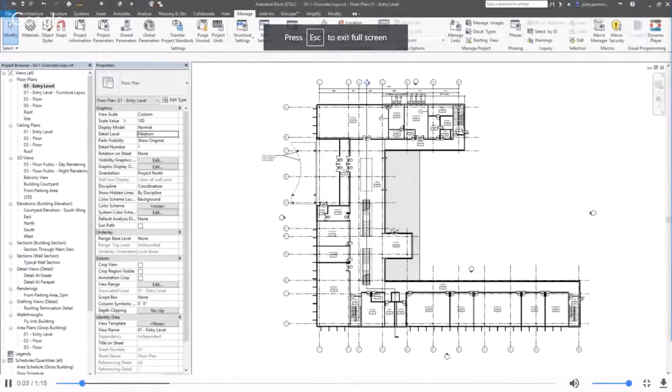What I did, and I'm not going to do the process again, I got every room in the model, got every center point of the room, placed an elevation marker at every center point of the room, and shot an elevation all 4 ways. And then I also sheeted those views on a newly created sheet with Dynamo in about 6 minutes. So I did that this morning in preparation for this.

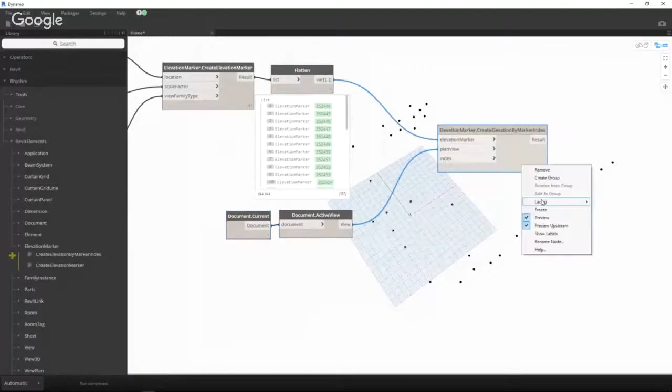So we see the elevation markers. There's a lot of little other things in here that I won't explain right now because I can't talk that fast. But we create an elevation at each corner of it now. So see that? Those weren't there before. We go from there and we generate a grid to place views now. And then I create a sheet. I take the amount of points I need.

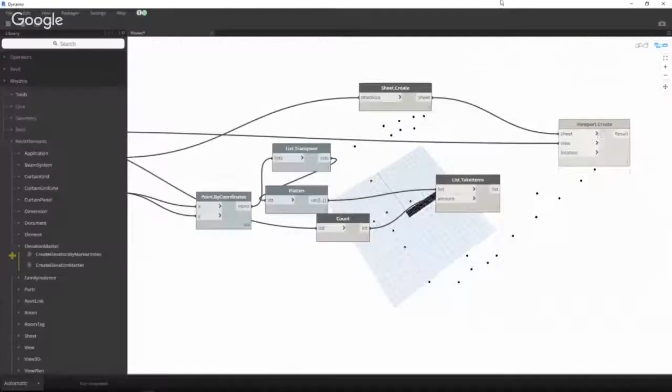I think I screwed up right here actually, yeah. I missed my point by coordinates. I was like, I'll leave it in there to explain it. And then I take the points I need. Oh, it was going vertically, I wanted to go horizontally. And then I create a viewport on the sheet with all those views. And I activated the sheet just for dramatic effect, so we could see all the views placed.

So it'll take a second because it's generating graphics for 136 elevations. In 6 minutes, I got that ready this morning. I was not about to sit there for hours and make views for an example. No, no, no. So yeah, I just wanted to share that with everyone.

Those are nodes that I made to create elevation markers that will be available in Rhythm next week, I think. I'm working on some updates and trying to get them done before AU so I don't break everyone's stuff and be in people's presentations and they're like, what the heck?

So the next example that we'll do is locating viewports. So does everyone love when their plan views aren't aligned and you're going through your sheets that are printed or PDF and it's like a flip book and the plan's jittering like that? It's awesome, right? In Dynamo, we can actually start to align those based on a parent viewport, and we can make all the children viewports follow.

So we can get a source plan view like area A and make every area A in the building follow that one as well, and I'll show that. How difficult is that to do though? It's one of my last examples. It's not that difficult. It's 4 nodes. So we're going to cover how easy it is to use some of these packages. Coincidentally, that viewport set location is mine as well. And then pick model elements is mine also, I think.

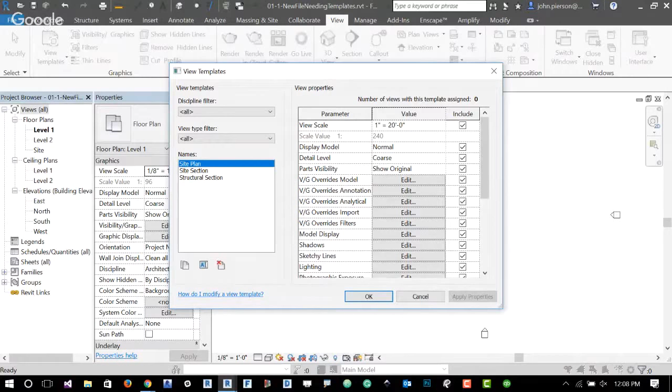What we're going to do is we have a Revit file. This Revit file has nothing in it. It's just a blank template I made with 3 view templates, I think, just because I wanted to show something. So if we go to view, manage view templates, we have 3 view templates in there. So let's say I want to load a view template from a file. In my case, I have a file on my desktop called like seed view template file, because that's where I'm going to get them from.

So what we'll do is we'll fire up Dynamo. I already have it open, but it's on the Manage tab in Revit 2017 and up, and I'll just expand it. So what we need to do is we'll actually build it with the logic of some UI in mind. So you got to think of how a computer would think about doing it. So I need to look at the file. So where's the file at? That's typically referred to as a file path.

So in Dynamo, a file path node looks like this. And then you can browse to wherever the file is, which is template seed file. Cool, that's where my file is. But if I want to have a UI that someone can interact with without really screwing with Dynamo, I could build that as well. And that's achieved through a package called Data-Shapes. So if we expand these bins on the left-hand side, which are packages or node libraries as they're called, Data-Shapes is one as well. We can expand UI and see a whole lot of stuff.

This guy figured out in Revit 2017 that Python scripts circumvent Dynamo Player and let pop-ups happen. And he went crazy with it. Like he went nuts and built all this stuff for us, which is pretty awesome.

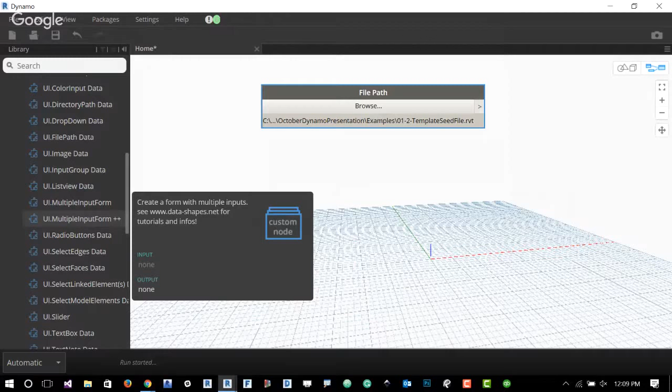So what we need to do is, I already kind of described it, but we need a file path. So UI file path. It's a little different because it has that stacked look to it. What that means is it's a custom node. So if I were to double click on it, it'll show me all of its innards. And in that case, it's Python inside of it, which is a programming language that Dynamo can use as well. So what we need to do is we just need to give this a name.

My computer's turning, it scared me.

So we need to give this a name telling people what this is. So for instance, if I double click and type a quote, I'm able to do a string, which is text. I always show the code block first, but people get mad sometimes. So if we right click and search for string, that's the same thing. A string is text. So we'll do like pick file to get templates from. And that'll be the name of that input. Not bad, not bad at all.

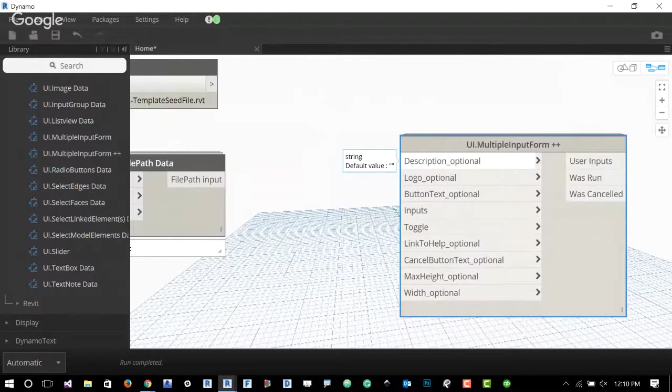So now what we can do is we can initialize a pop-up for people, and that requires something called a multiple input form. So if we click on that, this node's a little more intimidating. We can see that he has some descriptions for us. So description of what the workflow does. Do you want a logo on it? So yeah, we'll put a logo. So I'll actually reuse this file path and find an image that I want to use for a logo. And in that case, I'll use my cool 80s logo. And we'll just plug that right in with the wire.

So logo. And then a lot of these, if we hover over, we'll see that he already gave us a value. So like when you click the OK button, it's just going to say set values instead of OK. So he's doing that for us. A description's nothing, so we'll just leave that blank as well. Toggle tells it to run. A toggle in Dynamo is a Boolean, which is true or false or 0 or 1.

So we'll do is Boolean, right click search. And that's the Boolean. So we can put that right into toggle. Other than that, the rest of these don't need any input because I'm not going to use them. So we literally need 3 inputs. So what we need to do now is give this whatever the UI needs to do.

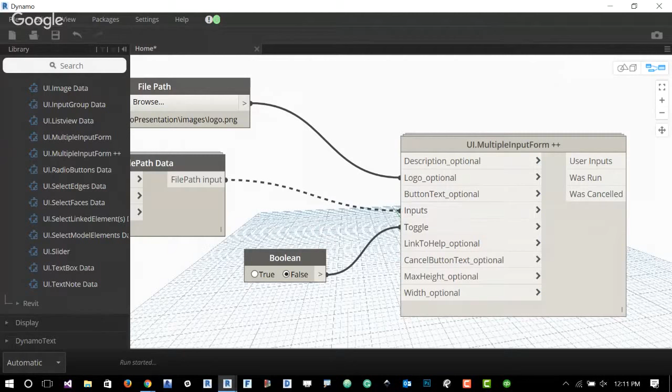So if we hit true, it should, I'm probably in a command. It should run and give me a pop-up. Run started. It generally freaks out like that when you're in a command.

That's no fun. Don't do this to me. Shouldn't have put the logo, John. Let's do that real quick and we'll reopen it up. Something happened. Yeah, I know. Well, that ticks me off.

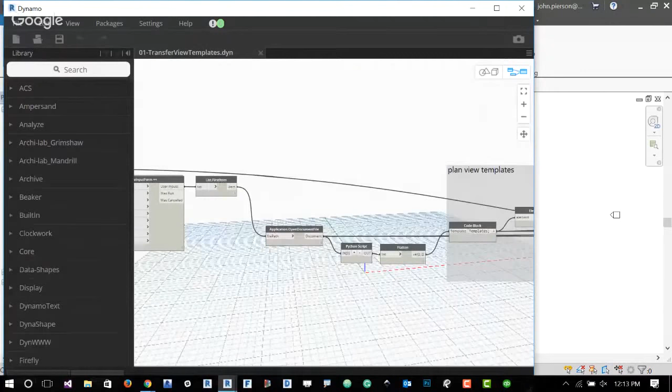So we'll refire up Dynamo and look at that again. I actually have a pre-cooked one and we'll just talk through it. So we go to examples and open it in manual mode this time. And I'll just talk through this one because this one's a really big example for the first one. I was going to build it manually, but whatever.

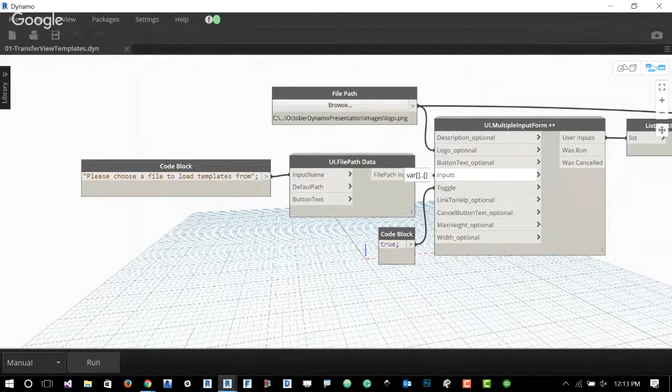So what we're doing is please choose a file to load templates from. I am initializing that pop-up, same logo. And then after that, we get inputs from it. So whenever a user has that file path chosen, it returns it to me in Dynamo. So I'm building this now with that thought that I'm waiting for that.

Additionally, if we step back, upgrading a Revit file is us opening it and closing it and hitting save. So all we need to do is open the document, and then we turn around and we can save it afterwards. So we're saving way back over here somewhere. This one's kind of big, I know. I apologize. And then we're saving it towards the end.

A lot of this logic in there, it's not the most difficult stuff, but the next ones are a little simpler. So I'll just get into those after we show this. So once we hit run, this one should hopefully run unless something changed. Or it's me having freaking 10 sessions of Revit open.

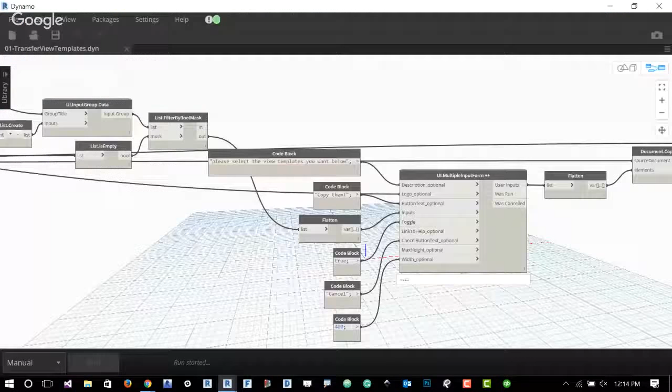My UI not going to work? That's awful. It's really acting like I'm in a command. Are you in the right session with Dynamo? Yes. Yes. So that's what I get for opening a buttload of files, huh? Well, that one's not going to work. That's a bummer. We're going to go ahead and close that one because it's giving me problems. Sorry, guys. Moving on. So what was second?

That's why I have like 7 examples. So we're going to generate 3D views for Revit elements. In our case, we'll go ahead and do them for rooms. So what we'll do is we'll open up this other file.

I had my template seed file open. I can't open my file while it's in use. Jackass. So at least I found the problem. Oh, that's embarrassing. Okay, we're still gonna skip that one. And we're going to jump. I opened the wrong one.

So what we're going to do is, I think I could do it in this file. The locate viewports. Yeah, we could do it in this file. So what we'll do is we'll create a 3D view for each room. So we just need to build some logic around that.

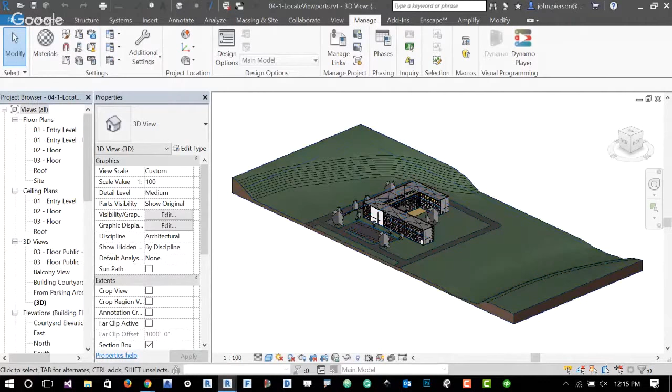So we need to gather all of our rooms in our model, similar to what you would do if you were to manually select a room like that and hit this cool little sandwich and create a 3D view of it. So what that does is that creates a section box in Revit for that one item. So you don't want to do that for every room or every door or whatever you want to isolate.

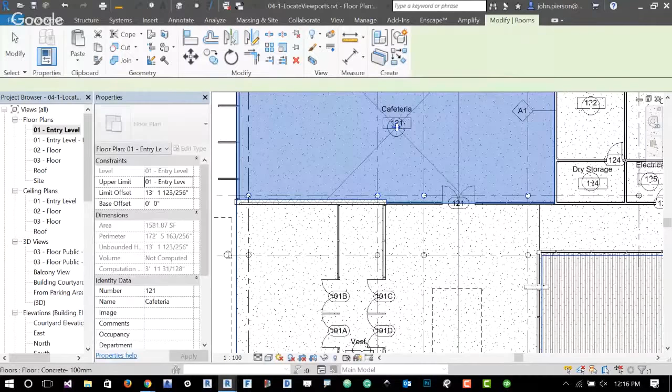So what we could do is we can collect all those rooms. And one way to do that is using categories. So in Dynamo, we have access to categories, rooms. So I told Dynamo I'm going to look at rooms and mess with those.

And now we need to collect all that, which is all elements of category. We have what to look at and to grab it. So we have 91 rooms in this model. We're actually going to take that up another step because I don't want to try to create views for everything. So we need to actually look at a few things.

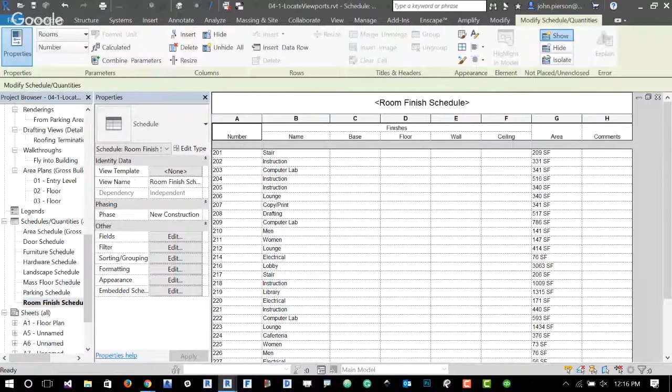So if I have a room schedule in my model, which I should, but who knows? Room finish schedule. We're going to see, this isn't the right model. So what we're going to do is manually place a room that doesn't have an area to it, a room that's unbounded, if you will. So what we'll do is we'll just place a room. So RM on your keyboard, cool.

Do I want to try to create a 3D view for that? Is that going to work for me? Probably not. So most users go in and they delete that thing, but we always get that warning message that we ignore. That one we always ignore, but it means that that room still exists. I still have that room in there. So what we could do is get a parameter. The reason I'm showing this is because this came up last time, I think, that I presented. And we can get the area of the room and start to filter out those ones that we don't want.

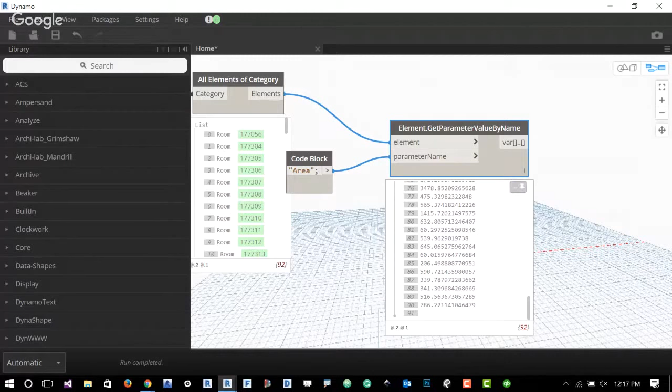So if we get the area, we'll notice that a lot of these have room area and one of them doesn't. It's actually the last one in my case. So what we need to do is get rid of that before we start to do stuff to the rooms. And that's done with something called a filter by Boolean mask. What this means is we're going to filter by a series of true or false values. So I need to create a series of true or false values first.

That last case where it doesn't have any area to it is equal to nothing, basically. So what we need to do is hit equals and compare it to literally nothing. So now what we'll get is a list of 92 true or false values. True means that that is not a real room, that I just don't want to mess with it. So we'll use that for our mask. What it's going to do is split the list up by true or false within Dynamo.

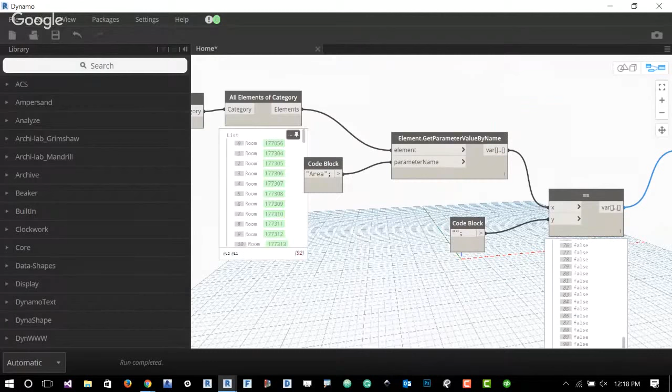The list that I want to split is this room. So that'll go right in there. And if we hover, we'll notice that one room is a crappy room and the rest are good rooms. So now we can work with those ones. So what we could do is go ahead and get the bounding box of elements. So every element in Revit has a bounding box, which circumscribes it.

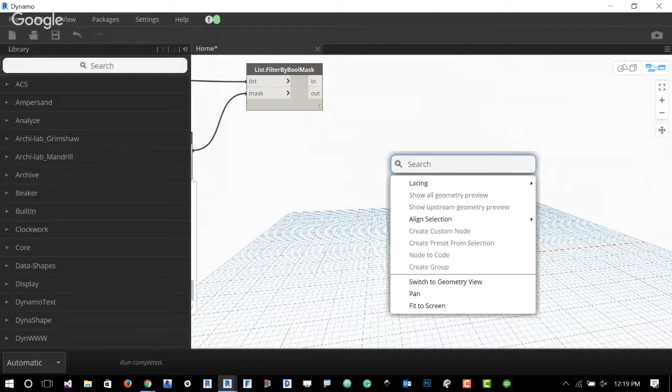So like if we have this eraser, for instance, and it's like this, the bounding box is perfectly square. It's like this, the bounding box is like this. So bounding boxes are a little weird still. They're not the greatest way to mess with stuff sometimes, but we're going to do it for this case. So what we'll do is search for element, and we put a dot because we're doing something to an element. Bounding box. That's an out-of-the-box node that we're able to use. So we plug that in, and really quickly, once I hover, we have a bounding box.

So we need to use that to set a whole bunch of 3D views to that bounding box, basically. So what we also need to do is make 3D views, because right now in this file, I'm only going to have the one with the little curly braces around it, wherever the heck it is. The one that every Revit file has. It might not even be created yet. There it is. So that's the only view we have right now. And we'll actually turn off the section box.

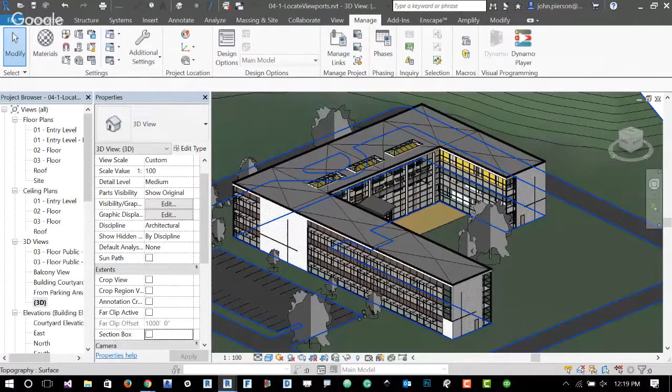So what we need to do is create a view for each room now. So we have to use some logic in that as well. So what we'll do is search for views, because I need to get the base view to work with. We'll look for 3D view with the curly braces eventually. That's not in alphabetical order for some reason. It's kind of annoying. So we have that 3D view selected.

So now I need to create one for each one of those bounding boxes. The easiest way that I find to do that is cycling a list, which means give me more of it, make copies of it just temporarily. So we'll look for cycle. And we need to tell it to create a list that's 92 or 91 items long of that view.

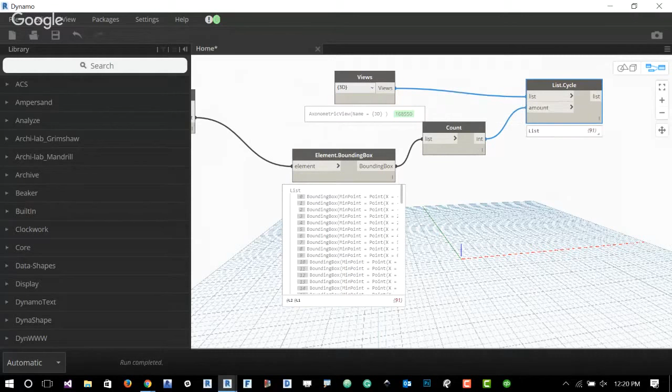So one way to do that is Dynamo's really good at counting. I could just type 91, but I'd like to make it to where it can adapt. So we'll just count that list. Dynamo's really good at math and counting for us. And we'll cycle up that view. So now we have that view 91 times.

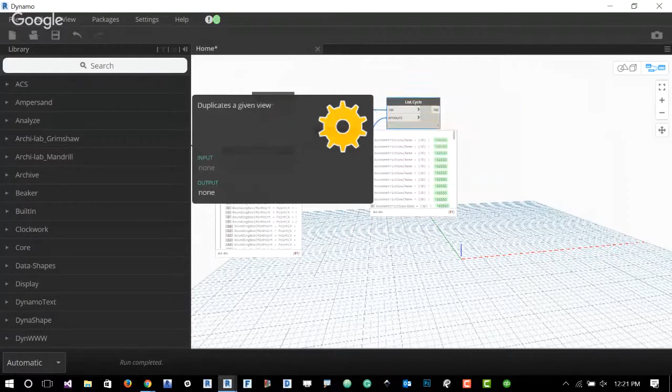The problem is it's the same view over and over. So if I were to set the bounding box right now, it just keeps setting the bounding box like crazy, which isn't fun either. So there's another node from Clockwork, I think, that's to duplicate a view. It takes a series of views or a view and it makes one copy of it. So now if I feed in 91 views, it's going to make 91 copies of it for me.

So we'll go ahead and plug that in. And it'll think for a second because it's doing a couple hours of work for you. And then we'll now have our views to be able to use them. I know, I have so many. I should have only opened one session of Revit at a time. But yeah, it'll go through and duplicate that view for me eventually.

I'm also running on automatic mode, which is kind of risky sometimes because you can get in an endless loop really quickly.

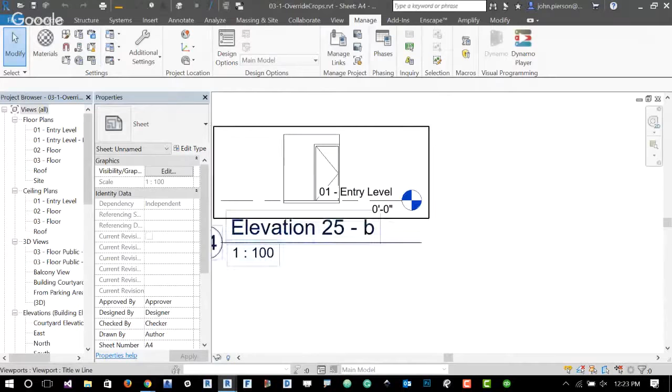If this one breaks too, I'm just going to be really ticked off. Don't do it to me, Revit. Dang. That didn't take that long to run when I practiced it. I guess I did feed it the whole 91. I should have done a whole level, huh? Bro. Don't do this to me. I should close the extra Revit sessions, huh? That's what I get for opening all of them. I hate making you wait for me to open them, but I might have to just leave that one running. It says not responding. We're gonna let that one run. I'm not gonna force close it, and we'll go into the next one. Am I selling everyone on it yet? Dang, man. Bad luck day.

Maybe this one you shouldn't set on that. Yeah, I'll probably turn off automatic, but that's kind of where the cool part comes in. When it is on automatic, it's showing the updates.

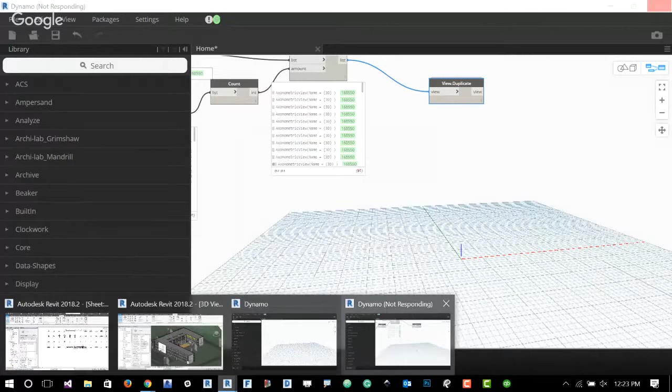Dang. I've never seen it that bad. Oh, did it finish? When I threatened it, did it finish? It's taking the window from me too. Now it's just being really mean. Let's close that session, and maybe it'll leave my other one open for me to play with. That's awful, guys. I'm sorry. You think it's the live stream causing that? Could be too, because I've never done that. GoToMeeting sucks. Well, we could probably go into this one, I hope. Otherwise, I'll have to do a refresh.

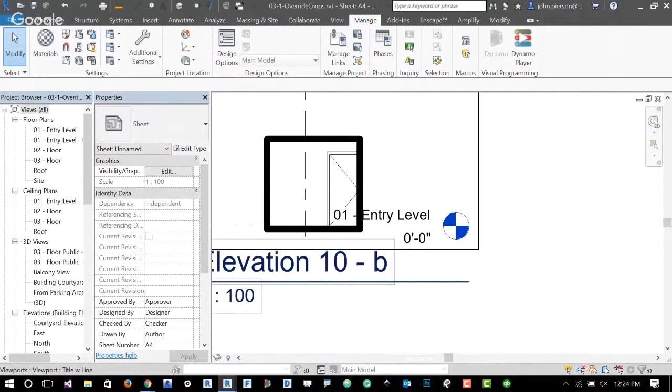All right, so we'll go into the viewport example with overriding those. Traditional method: right click, override in view by element, and we'll pick a weight of like 9. Or we'll draw masking regions. That sucks too. Masking regions is tough. So that other problematic solution, we'll leave it alone for now. What we need to do is get all these views on the sheet.

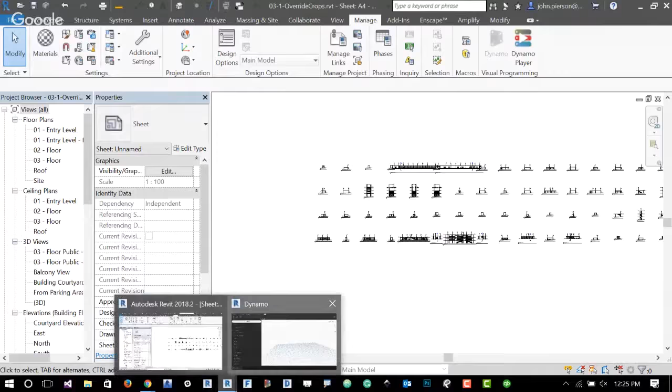So there's a few ways to do that. I'm able to get the views on the sheet or just gather all the elevations in the project. I'll show the elevations method. So we need to get the view types, so elevation markers. View type. This is from a package called Archilab Grimshaw that you can use as well.

And it has all of our view types in there. So in our case, I don't know if everyone knows it or not, but it'll show up as a section when I collect them. An elevation is necessarily a section in Revit's API. It's a little weird, but yeah. And we'll do get by type, and I'll get views by that type.

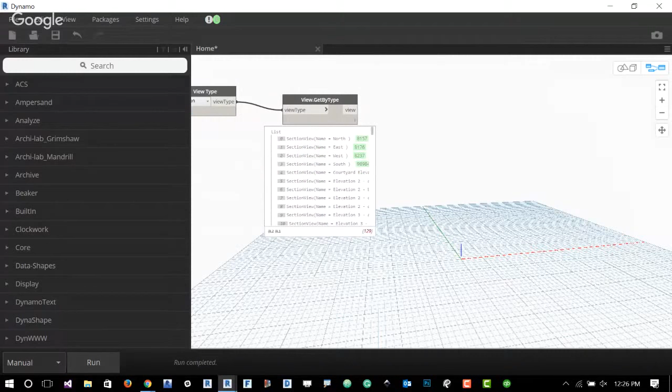So we'll see that it now says section view. That's a little off-putting at first because you're like, well, I wanted elevations. They're necessarily section views, it just works out. This logic's built in for us as well. So what we'll do is we'll probably switch this to manual just to be a little safer. And we will look in Rhythm under Revit elements and look in view section because it's a view section.

So we have two nodes in here. One's to override crop regions, a slow method that uses some really crazy other stuff. And then a fast method, which literally takes the view's ID. Does everyone know what element ID is for views and elements? It's like its driver's license. And it takes -1. So every element in Revit has an element ID. Views have an element ID, and -1 is its viewport.

I found that out by accident after pulling my hair out for days when I was trying to make this workflow. So it works most of the time. That's why there's a version 1 as well. So all you need to do is feed it the section views, and you'll feed it a line weight. So we'll do something really dramatic like 12, just to be able to see it.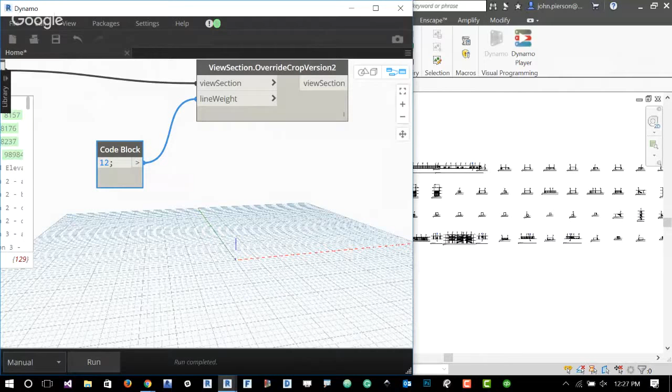Once we hit run, Dynamo thinks in the background real quick, and it overrides every interior elevation for me. It kind of happened really fast. I was shocked too. When we hit run, it changes all of them. So if we go to that crazy 16 line weight that no one uses, you can see that I set the crop region for 129 views all at once. That's pretty awesome because that's something that's super manual otherwise.

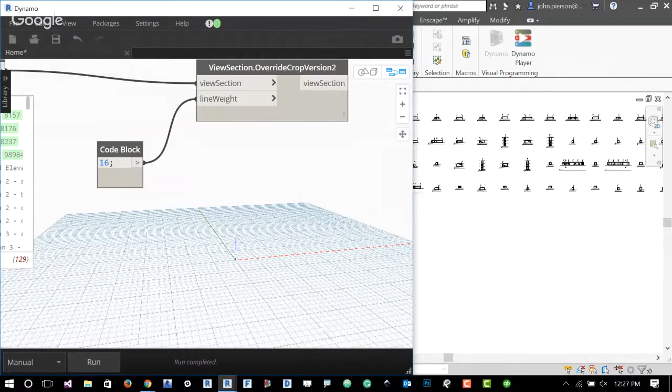I know when I found out what people were doing to get it done, I was like, oh my gosh, we could fix this, I hope. So yeah, I put it on manual mode just because I was kind of afraid from the last example, frankly. But the really cool thing is to see it on automatic and you slide it. Yeah, now you're just having fun with them and they're animating right before your eyes as well. Yeah.

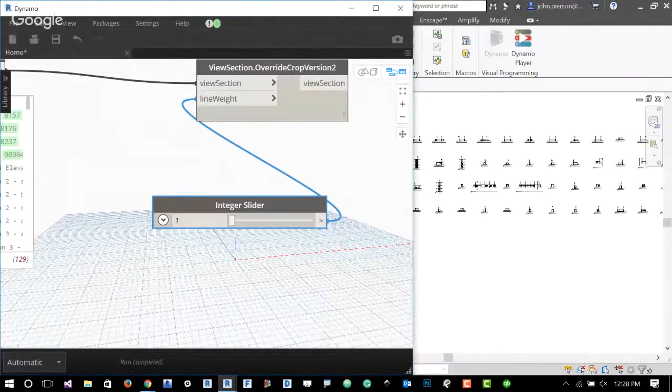Oh, this is a sheet that I made just for this example. So it's a really big sheet just with a whole bunch of elevations on it. Well, the way that this node works, I made this workflow. I just placed them all just for simplicity. But for this workflow, you literally give it whatever views you want. So you can select views however you want, whatever number of views, and you feed it into that input. So whatever you select, it'll take.

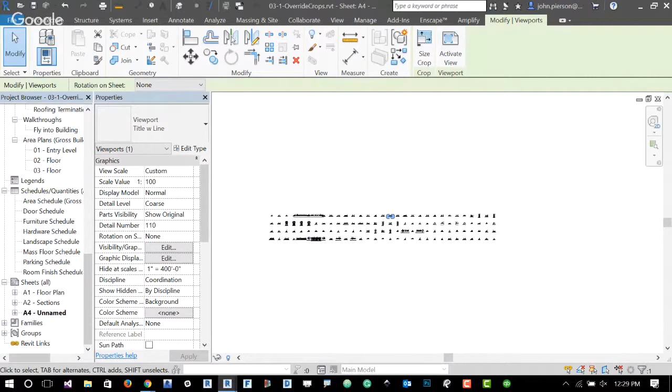It's not actually showing. This right here? No, all of it. Oh, this? But just like how they're all showing up. Oh, how I placed all these. Yeah, all the viewports. So these are literally viewports on a sheet. This isn't realistic. You wouldn't have 129 elevations spaced out. So those would all populate my list in Dynamo, and they'd be spread out over several sheets.

And we'd still have them placed on the sheet. So the view needs to be placed in order to get a viewport. So once you have all of them placed, you can feed them all in and update it. So that's kind of how that works. The idea is everyone's already done their interior elevations, they sheet them, and then we just gather them and screw with them, you know? So they have to be on a sheet.

Yeah, because the viewport outline, that might even be wrong because it can have a crop region even though it's not. I'm wondering, can you play with the crop region instead? Yeah. The reason I'm saying that is because of what I'm using, I'd have to look at it. I think you probably could mess with it still even if it's not on a sheet.

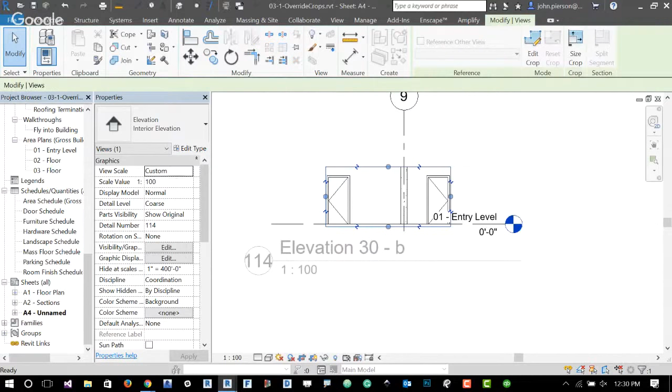I've seen lots of people do different things where you can manipulate that now. You can make it follow whatever you want, but they still want to see it. Yep. Yeah, it's still a very manual process. Yeah. I have to look at it. I've always messed with it on sheets because that's when I really care to see it.

So I have a challenge for you, John. Make the crop slightly bigger than what you want, and then pick a point in the interior elevation and find the outline of the section cuts in that space. That's really what we want. You want to have that little buffer, especially when there's cabinets. I can make it place masking regions.

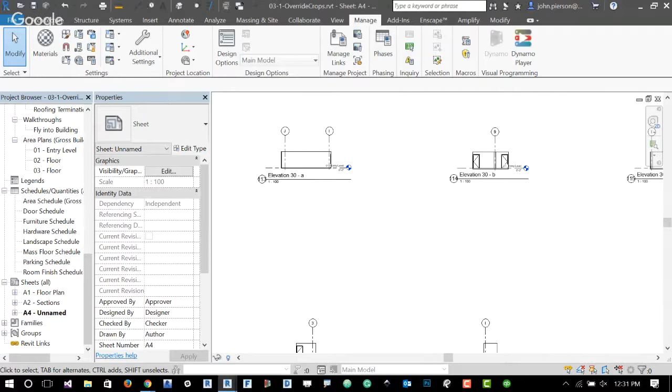Yeah. So there's dealing with the sloped crops, which potentially, if you can get that property. Also, in masking regions, you would definitely have some views where you don't want one side to have a heavy border because it's a good view or something. Yep, that's true. Yeah, this saves a lot of time for simple boxes. But for anything else, it still doesn't quite solve it. If you were still to edit your crop region, it'll still override it. Yeah, it's not bad.

But yeah, if we want to automate placing masking regions. No, don't do that. Okay. Please don't do that. Editing the crop to go around what you want. Yeah, that's one of those where I'm like, how do I know what you want all the time? That's right. Those are a lot of tough cases. Yeah. Just don't put them on the sheet.

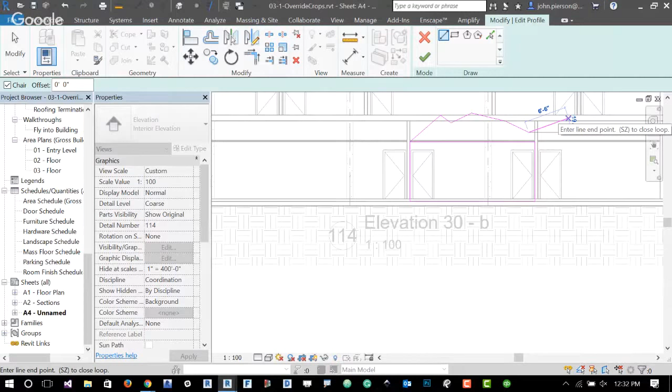I think did the edit crop region come up in 16 with an update? 15 or 16? Editing it to be able to do random stuff like this, sawtooth it. It was really horrible in Revit 15 when you tried to print with the angled one and your PDF was suddenly 400 megs. Yeah. We ended up sawtoothing them. So when it had an angle, we would go like a stair step, and it would print fine. It's about the percentage of that angle. Yes, it was crazy. All right, so that's that example doing those viewports.

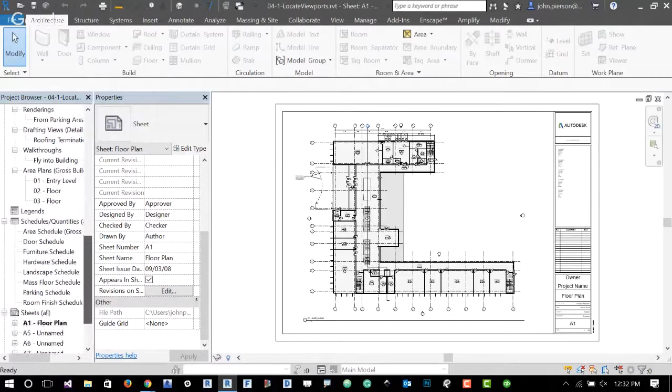So what we could do now is I'll run one session of Revit, and I'll open my locate viewports one. Ultimately, I think it all went downhill when I was opening the file I was trying to read. All right, so in this file we have a couple sheets I just made for this example. If I double click and activate each sheet, this is the way I'm going to show it today, but you can always automate this more. And we'll hit WT to tile them. We have all of our sheets open.

This one's a good one. It's on the sheet. All these, that guy's fired. I don't know what he was thinking. Maybe they automated it, right?

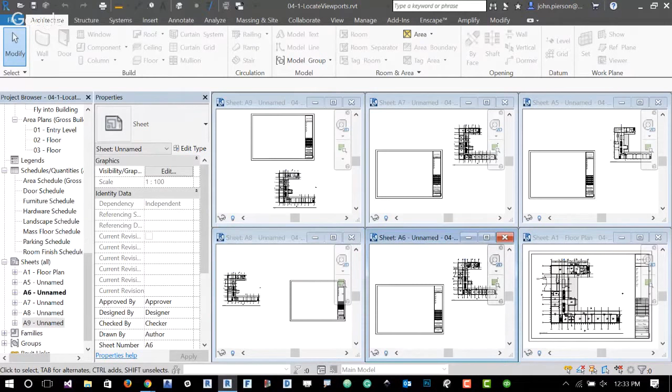No, I'm just kidding. So what we're going to do is get the parent viewport, which is this one right here, and we need to make all those children follow. We'll do probably one of the easier ways, which is manually selecting them. But you could very well automate this to look at every sheet and make a match. That's a little beyond what I wanted to show right now.

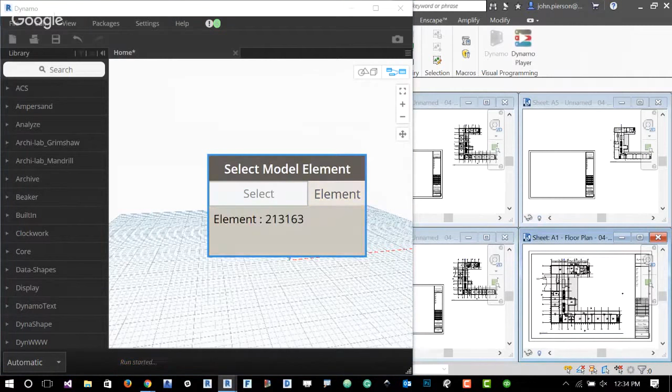So we'll start a new file. To select stuff in Revit, we can just type select, and we'll type model as well. Select model element. This node's a little misleading because everything's a model element, even annotation. You can use this to select viewports, sheets, title blocks, all that stuff. So we'll select the parent. Awesome, we got the parent viewport.

And now we need to get creative. My screen scaling sucks. We need to get creative and pick the other 5. A really easy way to do that, because I don't want to put 5 more of these, that's not very fun, is we can use other methods like pick model elements. So we'll do pick model elements, which is a custom node from Rhythm as well.

And we'll just place it. So what it does is it puts you in a selection mode, so a multi-selection with a finish. So that's achieved through a Python script embedded in there, and it's a Revit API method that you've probably seen when you're doing like a batch copy from a linked file or something.

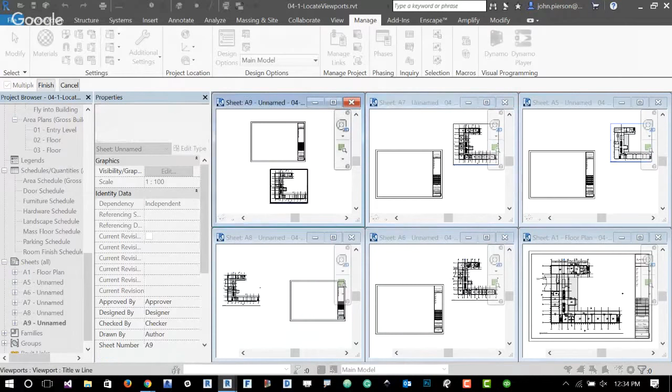So what we do is we go in, pick that first viewport, pick that one, pick that one, pick that one, pick that one, and hit finish. So now I picked all my children viewports. My menu keeps disappearing. And if we hover, we'll see 5. So we'll see in Dynamo that this element ID is different than these 5, which is good because I don't want to try to round trip them to each other. That wouldn't be very fun.

This is another node in the package Rhythm, so there's this Revit elements bin, and I'm converting a lot of stuff to actually use C#. And they're a little faster. All this stuff used to be pretty slow when I was doing it other ways, and now it's a lot faster. Within this bin, we have an option to set a location of a viewport based on another one. So the parent viewport is the main one that you want to copy, and the child viewports are all the other ones.

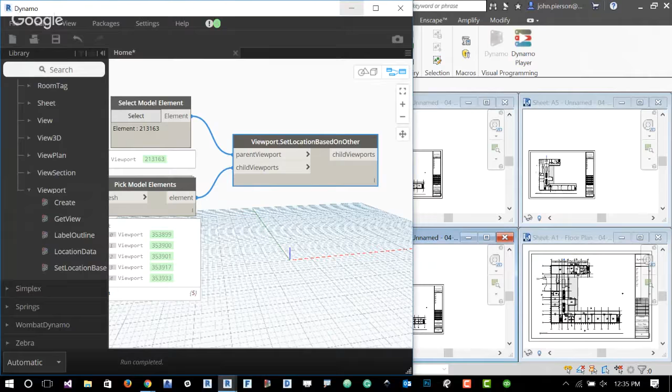So I'm going to leave Dynamo running and minimize it too. So what happened? All my viewports changed for me. All of them match now. They're in the exact same spot on that sheet, which is pretty awesome. Even more awesomer, if I drag the parent, all of them are still related because Dynamo's still chugging in the background for me.

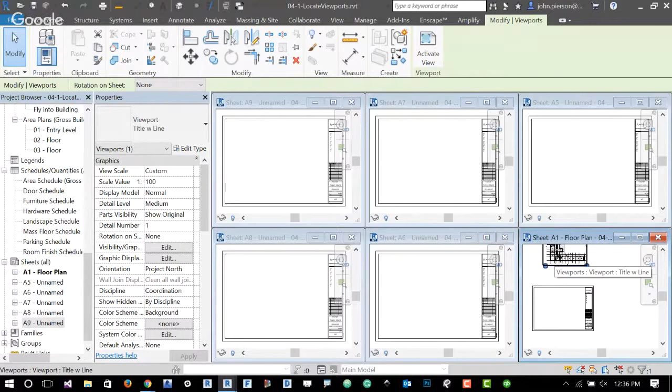This is something, how did we do it, reference planes, model lines, pulling our hair out? Guide grids, okay. Yeah, so they will now follow that one. They're like the little ducks following their mom now. Not forever though, because once I close Dynamo, that's broken. So just always keep that in mind too. What was that?

It's doing it by paper space units, so Revit paper space. So even if these views, I'll change the view scale real quick, because that's a good question. I like it. Where's my scales? This started as a metric project because it's the out of the box template, so that's fun. We'll just scale it up or down. See, I don't even know what the hell I'm talking about.

So what happens is in Revit, viewports have this thing called a box center. So if it's a square, it's the literal point in the very middle. So no matter the size of your viewport, it'll base its box center on the other one. So it's like putting that pin right in the middle of it. So every viewport, I'm gonna screw up the board now. That's the box center. This one, that's the box center as well. So now all we're doing is making those match, even if they are different sizes.

Useful for plans I've seen a lot, or area plans. If you're using scope boxes, your viewport's going to be the same size because you're using a scope box. But yeah, that's kind of what that was. That's another one of those ones where you've seen someone doing it so manually that you're like, no, just give me the money for the time you saved. So yeah, that's that example.

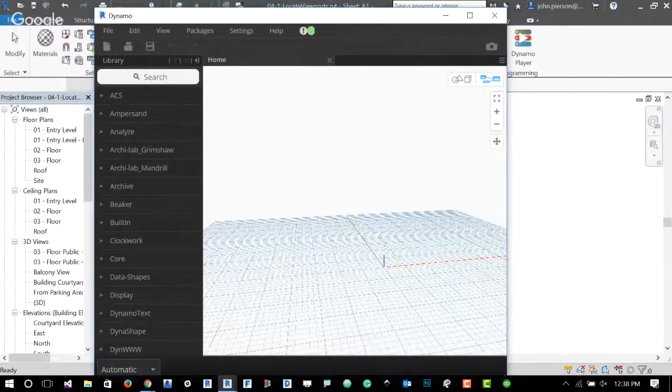The next one, and I talked about it a little bit earlier, is renaming a bunch of stuff from the project browser. This is actually a little easier than you think. Sometimes it's like, well, how do I collect all my views? How do I make sure I have the views I want? How do I do blah, blah, blah? So what we'll do is we'll open Dynamo. I found this with Patrick, I think. We were screwing around, like, what's the best way to get views and rename them? And we just found it and it worked out.

In Dynamo, if you do a select model elements, I hit select. How the heck am I going to choose views? If I choose the stuff on the sheet, that's a viewport. That's not a view. It's different. This grays out, so I'm going to hit escape. Funny enough, if you go through, you're able to select them like this, right? And hold down Control. Oh, wait, Revit 2018.2 new feature. Collapse all. You're welcome.

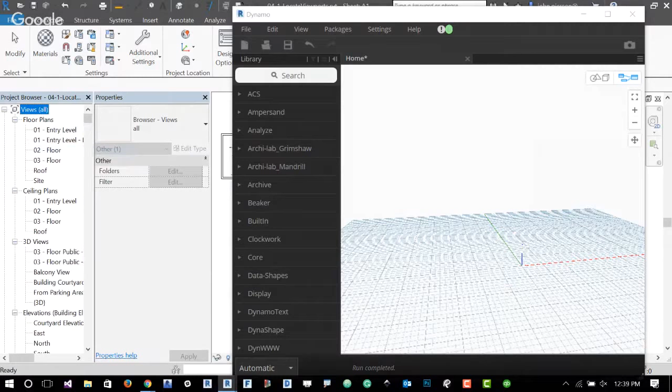That came out last night. Oh wait, expand all so I could see all of them again. Boom. So can I say I'm the first one to present on it live? Yeah, on 2018.2. All right, so what we're doing is we're selecting all of our views, holding down Control.

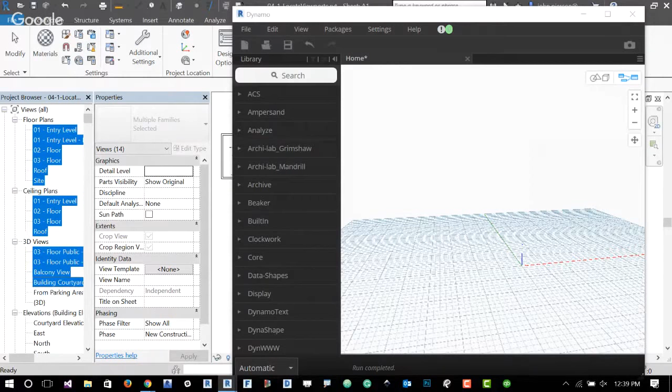Oh shit, I let go of Control. So this is kind of manual, it seems. What we're able to do is obtain a current selection in Revit with a package called Spring Nodes. They turned gray, but it's okay. The collector.current selection. So boom, I selected all those different view types all at once just by doing something that every Revit user should know how to do, is select views in a browser, right? Be surprised sometimes, I guess.

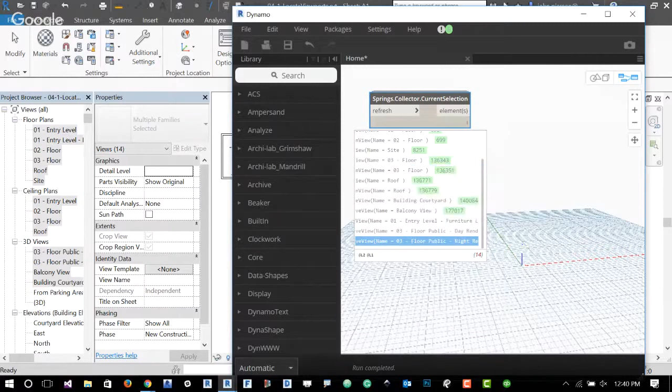So what we want to do is we want to append a prefix to that, and we'll just append something, whatever, today. So we need to obtain the name of that, because right now I have elements selected. In Dynamo, if it has a little green thing next to it, that's an element. You can't really tell what it is, like what its parameters are, what its name is and stuff. So we need to obtain an element, so a dot, because we're going to do that to an element, name. Element name. Tie that in. So now we obtain the name for each one of those things.

Yeah, it's a ceiling plan. I was like, how the hell? Okay, there's ceiling plans mixed in which have the same name. I was like, oh no, we have a bigger problem. So what we want to do is append a prefix. Once again, these are considered strings now, which is text, series of characters. So we want to be able to insert something at the beginning of that.

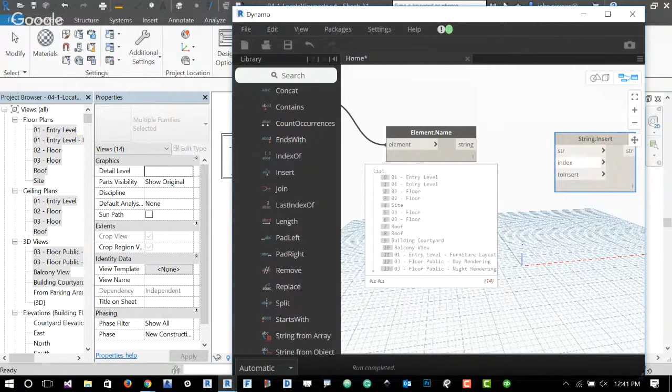So if we go to core, and we'll actually navigate to this one manually. So core and string, we'll see a whole bunch of stuff for strings in here. Like I could change the case and make it all uppercase if someone named a bunch of views wrong or something like that. I can add letters inside of it, remove characters, do all kinds of crazy stuff really. But what we're going to do is insert. So we need to insert a prefix into these view names. So I'm going to go ahead and collapse that. So this is looking for string and then an index.

Dynamo, like any coding language, starts with 0. So when you start counting normally, you go 1, 2, 3, 4, 5. You're going to have to do 0, 1, 2, 3. So I think the joke is programmers have 9 fingers and everyone else has 10 because they start at 1, but programmers start at 0, something like that. So we need to add this prefix at the beginning, which is index 0. So I'll double click and just type 0. And I'll do a semicolon just to break it up.

And what do we want to add as a prefix? Orange, I don't care. You have to put quotes. And then I'll just click somewhere else. So now we have a code block, don't let that scare you, with a number at the top and a string at the bottom. Luckily, those provide my input for this insert. So if I hover and pin, I now have the word orange applied. I think your hat made me think orange, just to be honest. Yeah. So now that's appended at the beginning of the name.

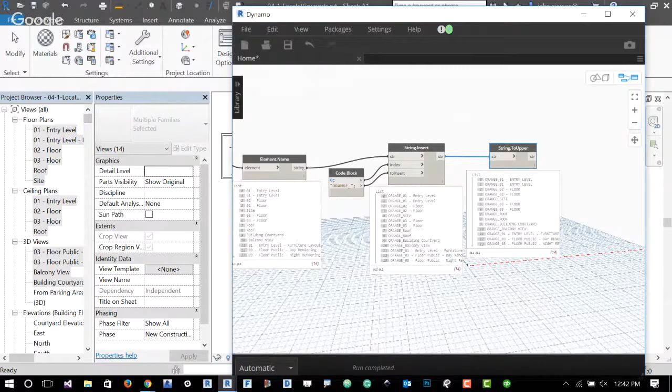So do we want to make these uppercase at the same time while we're at it? Might as well, huh? So what we could do is we could search for something called toUpper. And we could see that it takes a string and it pumps out a string. Boom. So 14 views, prefix, uppercase. Save time already. Has the change happened in Revit yet? Not yet. So we're still missing something. We need to push those changes back to Revit. Currently, you can actually see that's my old undo, but it doesn't have an undo for this because I haven't made a change in Revit.

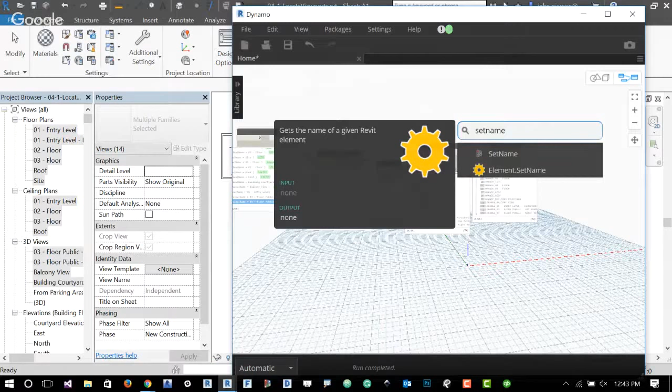So what we need to do is, a lot of times you just think logically, like I want to set the name of something. Chances are if you search set name, there's something for it, especially if you have Clockwork installed. If you have Dynamo installed, Clockwork, just do yourself the favor and have it. So what this takes is an element and name, and it'll rename them. What I'm going to go ahead and do is switch this to manual. And does anyone know why?

Because what it's going to keep doing is orange, orange, orange forever, and I would be pretty screwed again. So we'll switch it to manual. It might not do it since I use this selection method, but you never know. I speak from experience on that one, where it chewed up my file. It was just like Dynamo was all powerful at the moment.

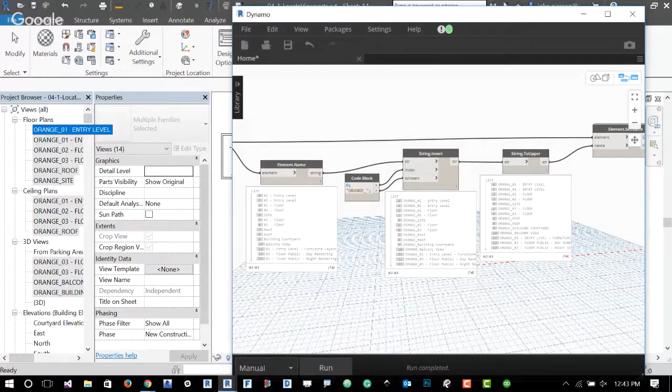So what we'll do is hit run. Boom. All of our view names have changed. Orange as a prefix and uppercase for the rest of it. Pretty awesome, especially if you're building a template from scratch and you need to do naming conventions. Pretty nice. Or you just need to update a bunch of sheet names to upper, something like that. You can do that as well. Uppercase is pretty common.

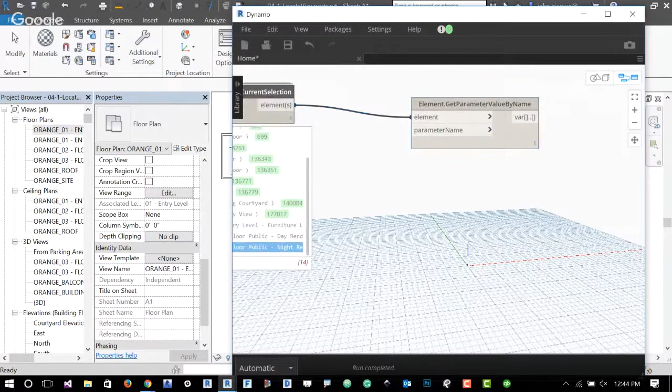How do you target just the title on the sheet versus the actual title of the view? Yeah. So let's do this. I'm going to delete all that stuff and hit run again just to make sure. And I think I could still work with that. We'll go ahead and switch it back to automatic. If we do a get parameter value, title on sheet is a parameter within the identity data of a view. So if I tie that into element and we just type title, and I don't know if that's the right case or not.

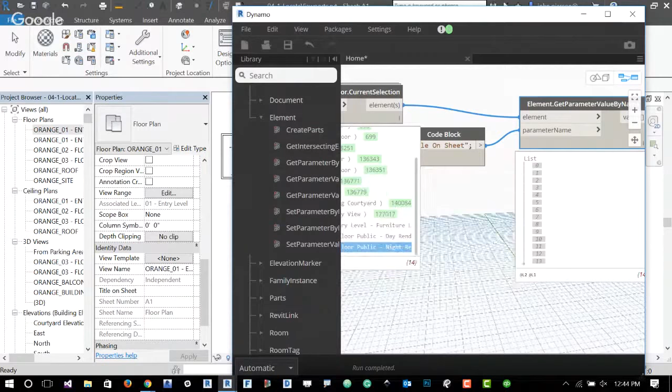So let's go ahead and leave that real quick and I'm going to talk about something else. So it's all blank because I'm wrong right now, right? Don't be afraid, I'm wrong. That's fine. The reason I'm doing that, and if they are all empty we'll fix that too, is because in Rhythm there's another node called get parameter value by name, case insensitive. So that way I don't even have to worry about that and embarrass myself.

So what we could do is elements, title on sheet, and it'll return them all. Like Arthur just said, some of them don't even have the title on sheet filled out, unfortunately. So yeah, we'll have to recollect them. That's kind of the bummer, because I was right. My node's not going to update until I recollect them. Which one did I even add that title on? So anyone pay attention? I wasn't. Oh, see?

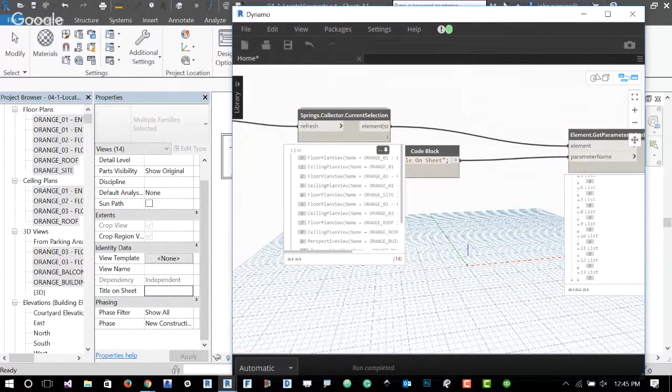But you just get the parameter for the title on sheet, and you can set the parameter. I didn't pre-add that as a parameter for all these, so that's kind of the bummer. But if it's an accessible parameter in the properties, you can mess with it. Additionally, and I'll just plug another one, tools. I'll do manual because I'm afraid now. All upper, we can convert views, title on sheet, by just feeding in a Boolean of true. So that's a tool that I made also that you can use.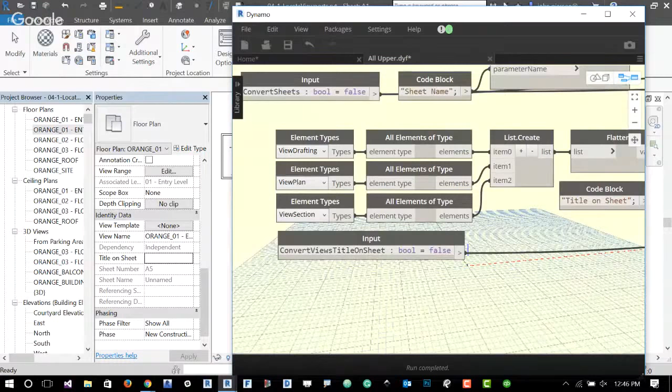If you just bust into that node by double clicking, you can see the logic in it, which looks a little intense or heavy. This is one of my first nodes, so I think that reveals a little bit too. Look at the innards. We're collecting all the views, getting the parameter value by name, the correct name, converting it to uppercase and then setting that same parameter at the end. If you download it, you can work through some of that to learn from. That's how I learned a lot of it too. Does that answer the question, I hope? It's not a read-only parameter, thankfully.

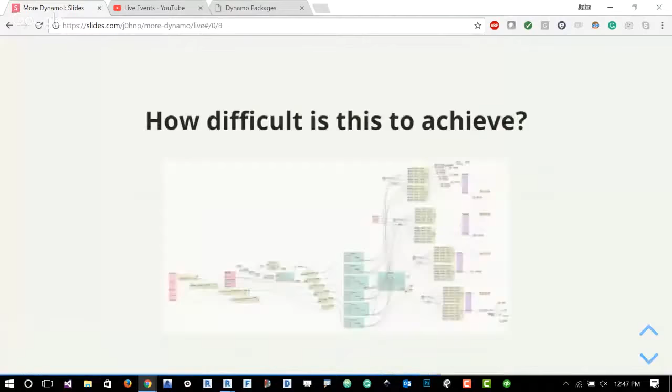All right, so we did the override, we did locating viewports. The 3D views kind of crashed on us. We can look at tagged and untagged elements and views now. So I'll open another Revit file for that. We're right on time, so that's good news. We'll close this darn Revit file.

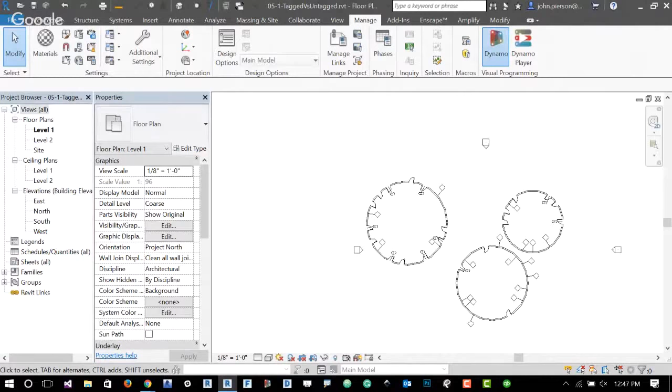And I have a special file for this too that's just kind of messed with, so that way we can see some tagged and untagged pretty easy. So there's a lot of stuff just going on. So what we could do is open up Dynamo again. This is kind of why I have several sessions open at once, so I don't have to do that every time, but what are you going to do sometimes?

And then we'll look at another node available in Beaker, and I think we'll call it a day on this one. So if we go to the Beaker bin, it's named Beaker. Our company's name's Evolve Lab. I'm super clever, and Beaker's a glassware, right?

So what we'll do is we can look at utilities. This is basically almost like a Revit add-in. That's why it's called a utility, and we can obtain tag status by view. So what we'll do is we'll collapse this, and we'll see that. So what we need to do is figure out what view we want to look at tags in, because tags can exist in views, and plan views specifically.

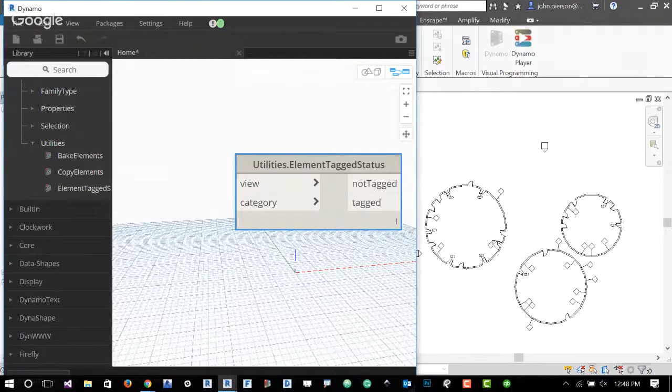So what we'll do is we'll look for active view, which obtains the view I currently have open in Revit. Springs has a really nice one that just does it for you. The out-of-the-box method is a little weird because it takes 2 nodes when I can just use 1. So 1, and now we need to look at categories. Specifically, I have walls and doors in this view. So we'll go categories, if I could spell.

It is a little laggy in general. I didn't know YouTube was going to rob from me so much.

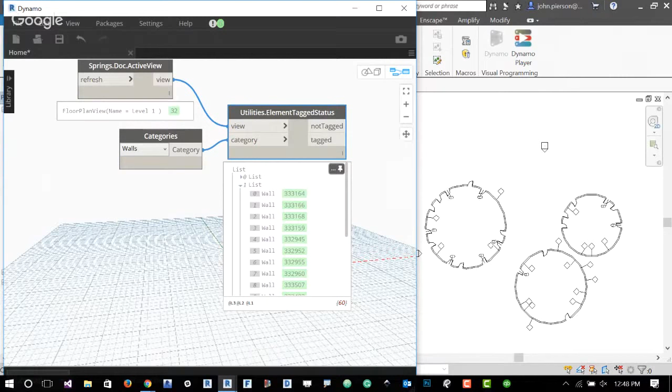And we just feed the category that we want to look at. So now we'll have 2 lists that are split. The top list are not tagged, and the bottom list are tagged. So 2 pretty long lists. So now what we can do is we can override colors in view. So we do override color, or you can do like a set parameter and push that to a parameter and filter by it. Filters are really useful too. And we can override those to be a different color.

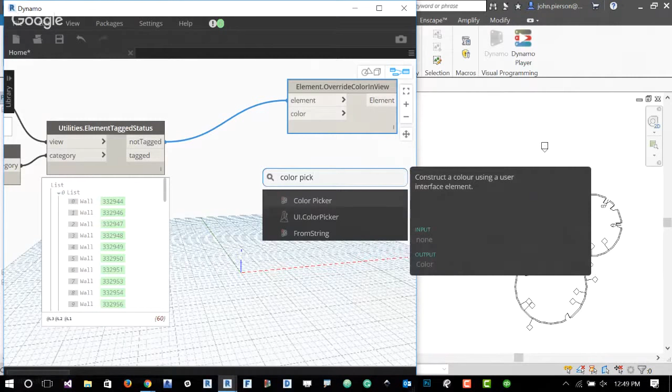So let's do color picker. This color picker right here is from another custom package called UI++. Custom packages are available in packages. Search for a package. That's supposed to be in version 2.0 of Dynamo, I think, natively. But for now, you just search for UI++ and install it. The reason I really like this is because I can just pick a darn color and be happy.

The Dynamo way of picking a color is, if I search for color, I have to define the alpha and the RGB value. Each value, I have to define it manually. That's not very fun. I just kind of want to pick a color. So we'll just pick a color. And I bet you I need to override the projection color. Let's do it in a 3D view,

actually. So we did all of that stuff in a plan view. What we're going to turn around and do is look at it in a 3D view. So really quickly, those are not tagged in that view. So I can already see that and start to work with it and mitigate that issue. In a plan view, you'd have to override the cut lines, which takes a little more thought that I'm not going to work through right now. So yeah, we can start to isolate that stuff as well.

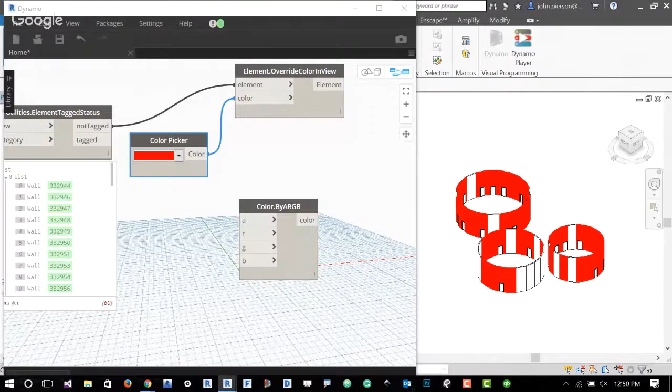So if I go back to my plan view, we'll just remove this. We search for isolate. We can do a temporary isolate in the view. So it takes a view input and it takes elements. Those are my walls that aren't tagged. So it's like that magnifying glass starting to investigate my model for me, which is pretty cool.

And then all you need to do now is HR for reset hide isolate on your keyboard after you've kind of looked at it. And then you can go through and fix whatever's wrong and kind of go from there also. So that's a tool that's available in the Beaker package. If there's ideas like that, let people know. I always like it when people have ideas. It's really awesome.

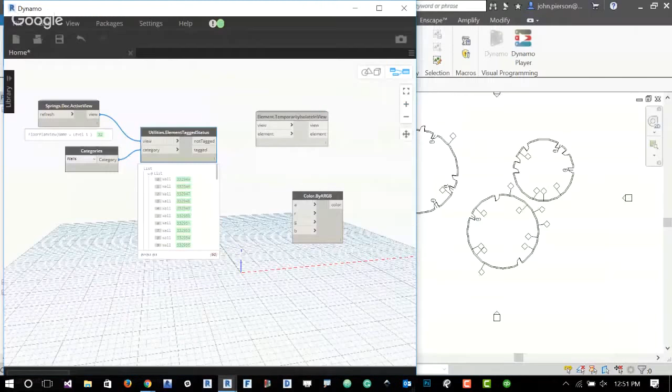So what we'll do is we'll just run it on this file. So what we're doing is we're running this in Dynamo. So we're requiring Dynamo just to be able to do this. So you just need a Revit file. Any Revit file opened, even a blank template. And what we'll do is I'll just open the done file and just talk through it again.

I don't like to do that, but. So now we can see that I am picking my directory. The directory that I'm pointing at is one that I copied. It's a door directory right here, and it has a bunch of subfolders and a bunch of doors. These are all out-of-the-box things. They're all in Revit 16 also, so I want to upgrade them.

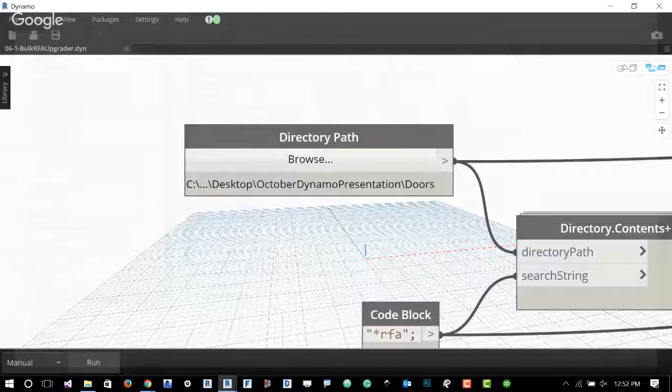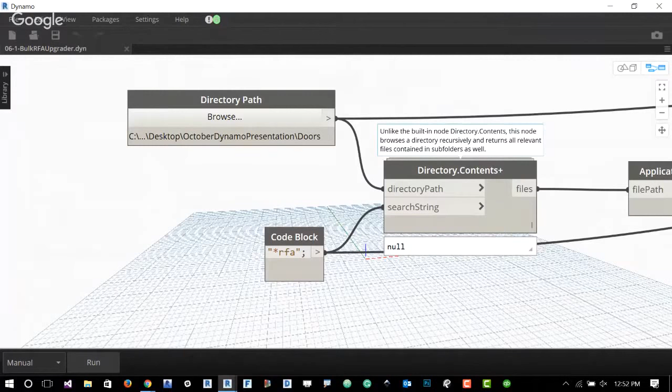So what we'll do is we'll browse to the right one, because I tested that on another one this morning. We need to obtain everything from that directory. So Clockwork has a node called Directory Contents Plus. The reason it's a plus is because it searches all the subfolders too. There's an out-of-the-box one in Dynamo, but it only looks on the very outside of the directory. It's not very useful when you have families that are nested in folders like crazy.

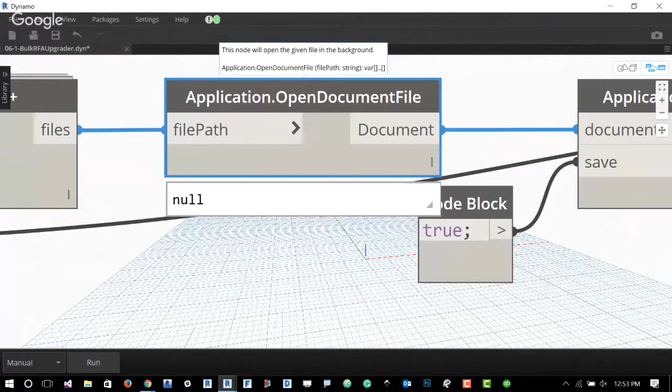So what we'll do is we'll search for Revit families. You put an asterisk, RFA, and it searches for files that have that, because there's also text files in there. Revit can't open a text file through File Open. We need to open the document, which is in Rhythm as well, so Open Document File. And then we just need to close it really fast. So that's literally all we do. Open, close, save. We're just mimicking what someone might be sitting there doing.

Additionally, we have this thing called a pass-through, which is saying this back half of the graph. Dynamo's stuff is called graphs or scripts as well. I think I might have skipped that. That pass-through is saying all this stuff, wait for this stuff to finish before you try. So what we're going to do is we need to delete all of the backup files, the .0001.

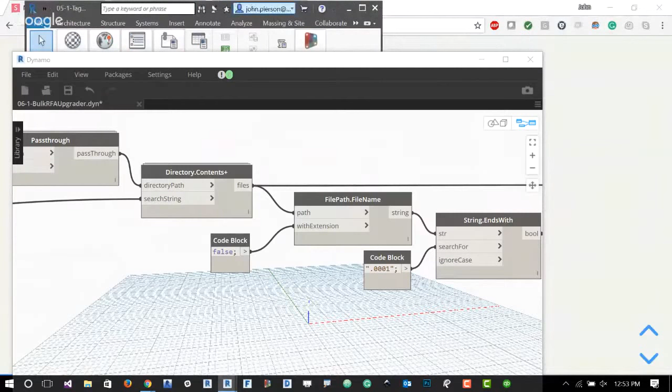So all we need to do, and can I tile this so we can see it working? I don't know if I can. Has anyone else noticed that glitch in 2018? You can't just grab it, you have to minimize first. Yes, it drives me crazy, and I'm on a scaled thing.

So what we do is we'll just hit run, and Dynamo's in the background just going open file, upgrade, save, open file, upgrade, save right now. And it's quite a few files. We figured out whether it does all the opens and all the saves. It does all the opens first. You need the memory to open all those files at once. Yeah, it does all of them, because it's kind of freaky. But we can see it in my Windows Explorer chugging right now.

So what it's doing is it's cranking through and it's doing each one with the open and save, and then it'll come back through and it'll remove that backup file. If it doesn't, we'll just hit run again, and then it'll remove the backup file, because with the little wait thing, sometimes Dynamo doesn't want to wait. So it's still not quite at that file. Oh, it did it already.

What if you wanted to audit the file too? You put that in there. You could build it. That's available. This one just opens. You can also do a detach from central. So you could do a detach from central, audit, save as, if you wanted to compact a file. So you can also do that. It's just not in this workflow. Yeah, we can see everything should say 1254 now, and there's no .0001s.

So yeah, I think there's a tool on the Autodesk App Store for sale that does that same thing. So you can do it for free now. Don't tell them that. They might be mad at me. But yeah, that's all the examples except for the view template one, which you guys can still have the data set and try it out. That one jacked everything up, I think.